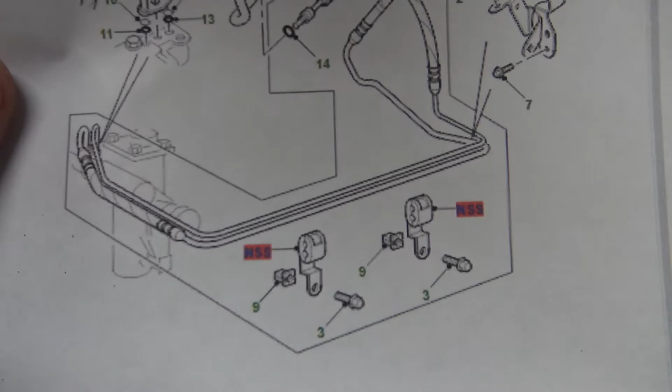That's lucky, wasn't it? Let's have a look at this. This is that parts diagram I was talking about for the work I've got to do on a Discovery. Now if we have a look here, let me get a pointing device. This pencil should do. This here is what I need, which is number...

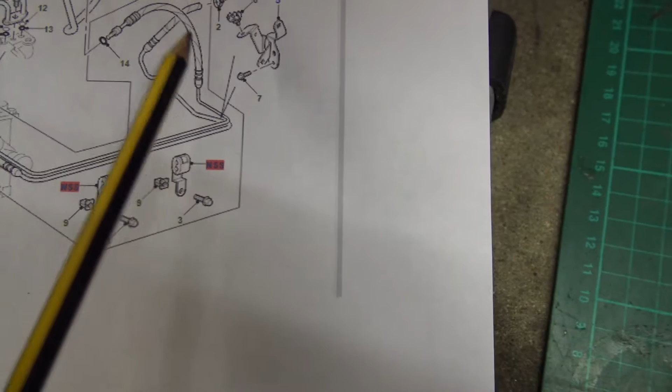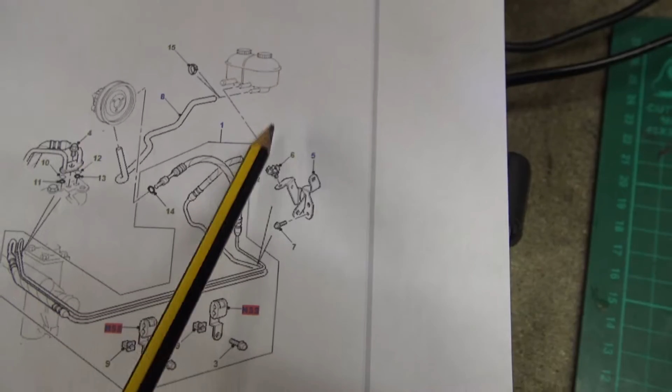What is it, number 1? I don't know what number it is, but it's that there. Basically it comes as a pair. That code goes to the box, comes around, and then one goes on to the thing, and the other goes on the pump. So this is what I need, because there's a hole around about here somewhere on mine, on the high pressure side.

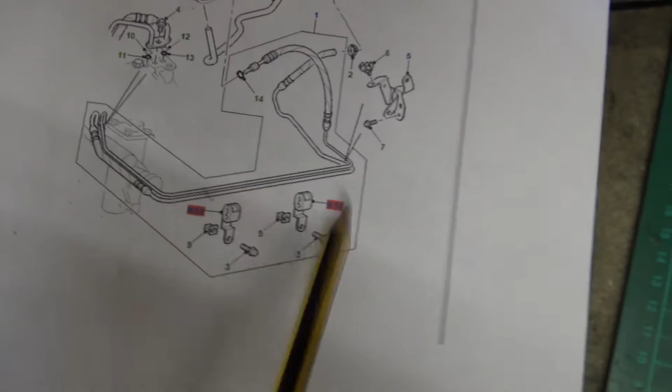So yeah, that's what I've got to get. Now the thing is, the radiator's up here, the intercooler's up here, and it's a pain to get to when I tried to get it off before. So that's what I've got to get, and that's why it's going to be a pain in the arse.

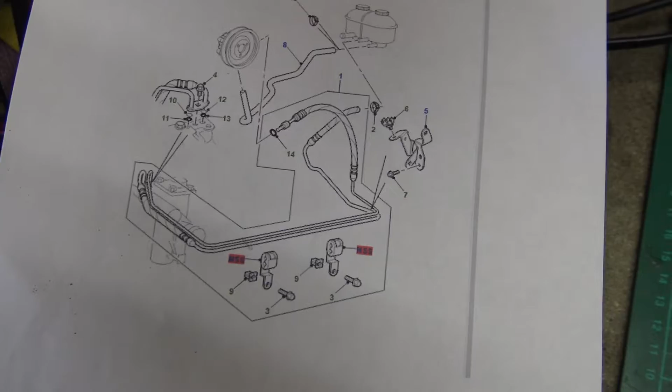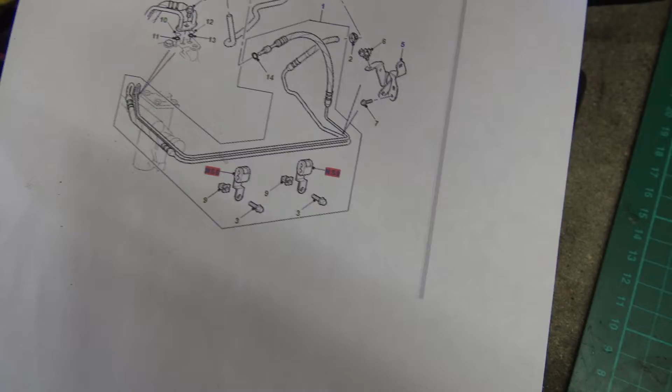I know some of you are like, oh it's easy, and it is easy, but it's just long-winded, because you've got to take the radiator out, the intercooler out, the lights come out because it's easier to get to that way. The grill's got to come out because it makes things easier - you put your hands through and all that kind of stuff. Not to mention all the rusty bolts and things, but that's the thing.

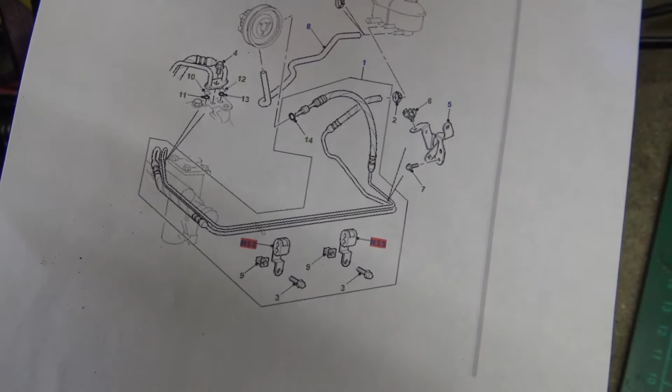So let's have a quick look in Haynes and see what they say. I always like to check - it always pays to try and... some people probably don't, and I never used to, but as I've gotten slightly older, I've learned it's easier to prepare things, and then things tend to go smoother. So I like to always check the Haynes and see what they say, and follow what they do. But there isn't - oh, there goes the bulb.

There isn't actually a section for removing the pipes, it doesn't seem so anyway. Suspension and steering, I can't seem to find a section for actually just removing the pipes. So I should imagine removing the pipes is a part of removing something else, probably because it's an easy thing to do, or it might be in this section for removing the steering box or something. But there is something else I need to do while I'm at it.

I need to adjust the backlash on the steering box. I saw that somewhere - steering box backlash adjustment. So I'm going to be reading that just to see what they say about that. As far as I know, all you got to do is... you're supposed to take off the ball joints and check for slack, but I know there's slack there. So I'm just going to loosen the locking nut on the box, and there's a little screw inside.

You just tighten it, and it should take up any movement. And then if it starts to get stiff or bind up or anything, then you know the box is worn, and you've got to get a new box or get it all reconditioned. So while I'm there, I'm going to do that as well. But I'll read up on that in a minute and see what they say, just to see if there's something I've missed. Maybe there's something I should know in there.

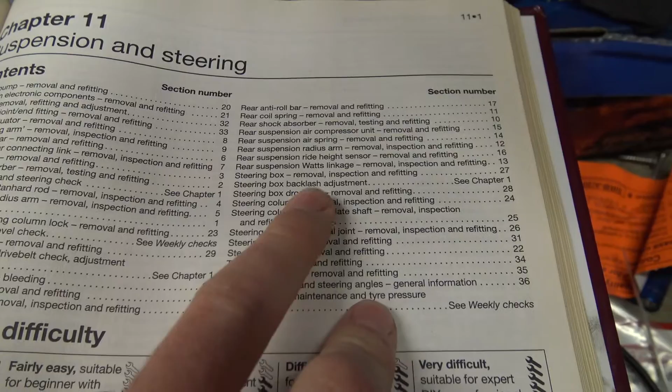But yeah, so all I've got to do is change them pipes. Bloody hell. But the trouble is, I think the pump's had it as well, because the air that's been introduced through that thing is starting to make it whine. It's started to whine a lot now, so I think there's a bit of trouble there. But we'll find out - that's in a few days to come.

I've got to try and save up for the pipes - 135 quid for the pipes, brand new from Paddock. And the pump itself is 100 quid. So I'm going to do the pipes first and bleed it all out. If the pump's had it, then I'll have to go get a new one of those, or get a reconditioned one, see what the prices are like. But yeah, oh, fun and games.

I tell you what, it's going to be bloody typical. I've been 3 weeks out of work because of this disease. All this time I've had, I could be doing it, but I haven't been able to afford it. As soon as I save up enough to get the pipes and do the work, they'll probably call me back to work, so I won't have time to do it. Plus I've got to drive that car to work. It'll be typical, but I won't say no, because we need money.

Bloody handy, these Haynes books. The trouble is, this one doesn't actually cover mine, but it's close enough. Mine's a 54, but it goes to 04. Still, bloody handy, the old Haynes books.

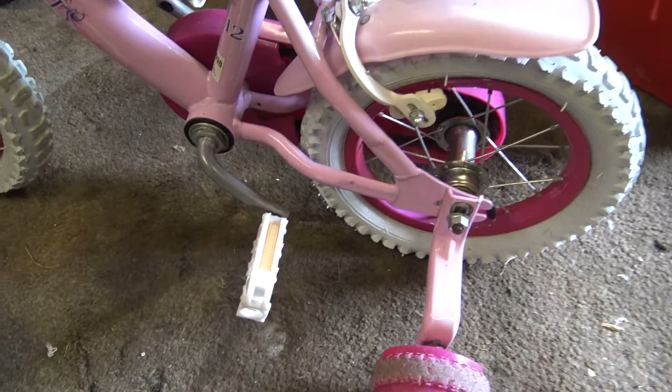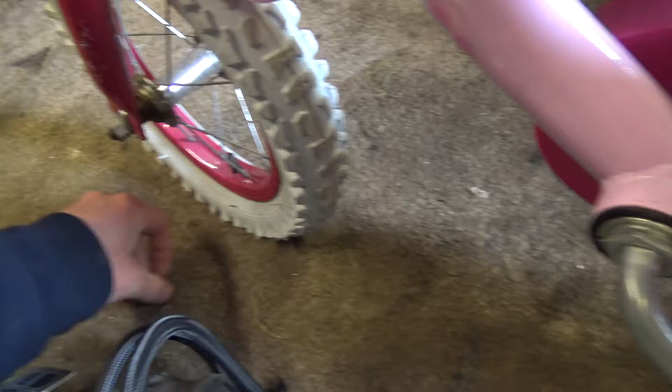I went out for a bike ride the other day, and I noticed my tyre was a bit low. I managed to get back alright, but it was a bit hard to pedal. So I'm just going to stick some air in there. This Ryobi inflator is pretty handy, I haven't worked out how to use the deflation part yet though. At least now if I pump my tyres up, I'll be able to go on more bike rides. It's bloody hard to pedal with half flat tyres, I'll tell you that.

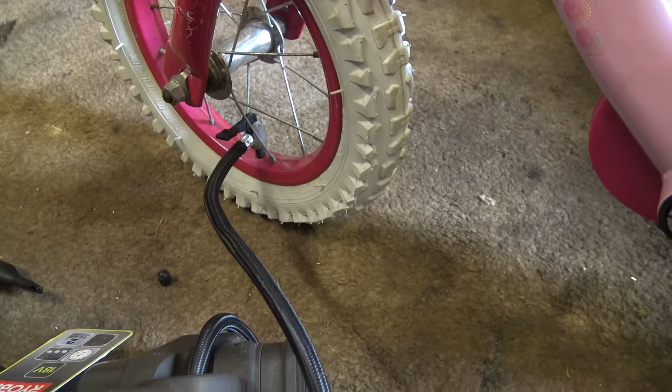How much should we put in there? Let's turn it on. We'll put 5, not 10. Oh, that's nearly there, 7. It says 7.5 even though I put in 5. We'll go to 9 then. Oh, that seems about right to me. Oh, that's lovely. What's that? It's 12.5, even though I put in 9.

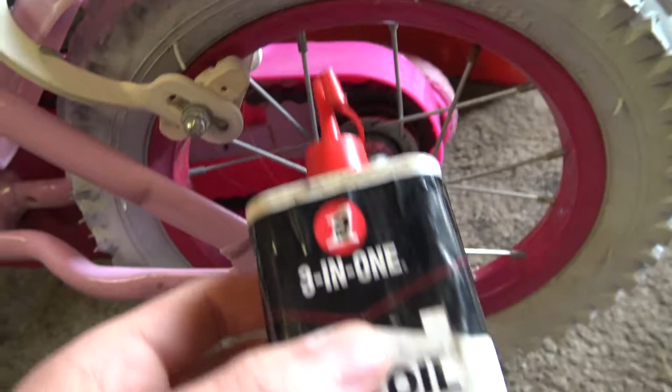Better do the back one, then I'll be well away. I better adjust my brakes. My brakes are alright, but I did notice going down a hill the back one weren't really working that well. So a bit of adjustment and we'll be well away for a bike ride, I reckon. A little bit of lubrication on the old chain as well. I think I'll use some of this 3-in-1 oil, since I haven't got any proper chain oil.

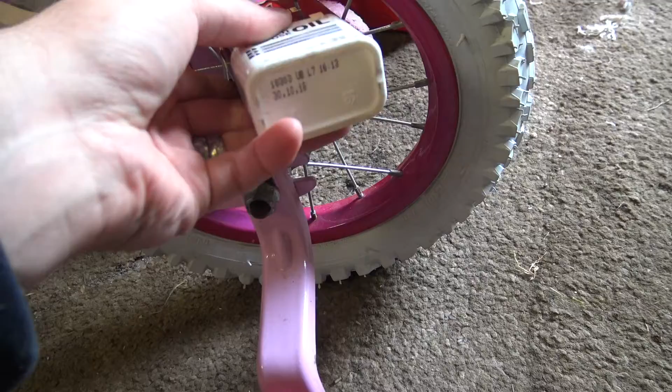The chain's a little bit tight on this. Might have to loosen it up a bit. It's difficult to try and do it with one hand, but I'll do it with two hands. And there we go, a nice lubed up chain.

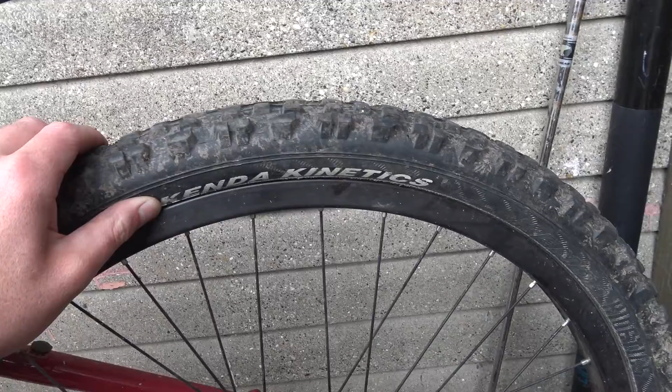Now we've got this bike, which is actually my daughter's, that needs a bit of TLC. It's been in the shed for a while. It's got mould on the grips, and the back tyre was flat. It needs a new tyre because this one is slightly too big for the rim — I think you have to properly line it up, otherwise it comes off the bead, off the rim. It also needs a new inner tube, the whatchamacallit that goes on the inside. I've got some spare ones though.

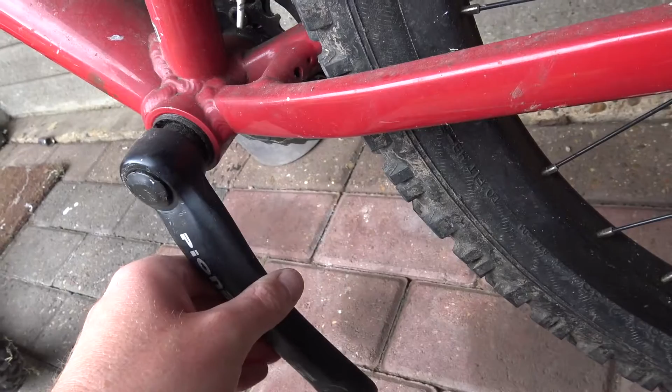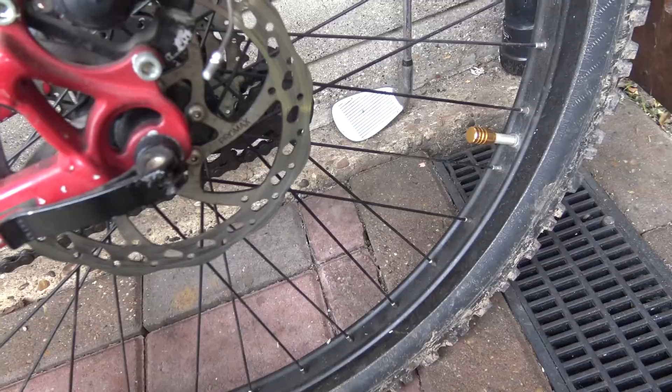That's seen better days, that needs doing up. You have to look into that — yeah, it needs some work on it. So, you know what that means, don't you? Get the old pressure washer out and give it a good old wash, and we'll go from there. Lovely.

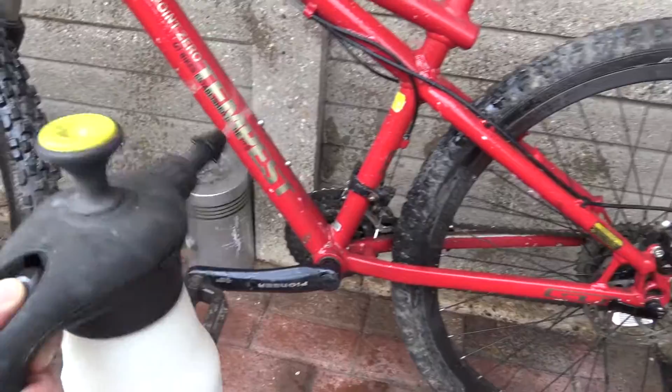Nice bit of degrease. Love it.

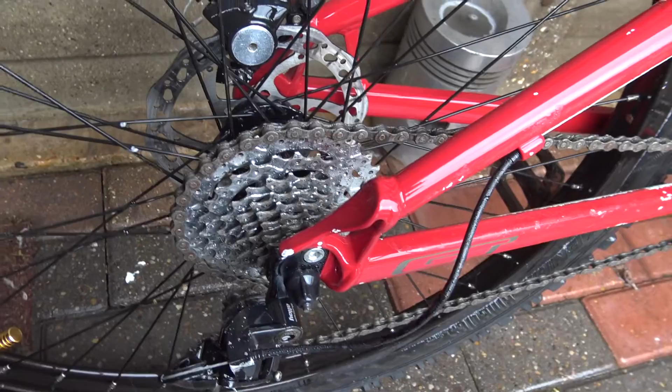Scrubbed up quite well, managed to get all the cogs nice and relatively clean anyway. Gonna have to give it a spruce up. I was going to get a new chain for it, but I don't think there's any need. I think it needs new brake pads front and back. As for the bearing, I don't know whether that is visible on your screens, but it's had it — well, it might not have had it. It needs tightening up perhaps, because back when I was a kid riding BMX you could tighten up the bearings, and I'm pretty sure you probably still can on these. I'm going to have to find out.

Take the back wheel off — if you can tighten it up, I'll be alright, if you can't, I'll have to get a new bearing. But that needs to be sorted out, and we'll be well away. Pretty pleased with how well it's scrubbed up. It's an old bike, I don't know how old it is — a GT Tempest 3.0, probably more than 10 years old. Good though.

Needs a new seat, the seat's not very comfortable.

The seat that came with it was even less comfortable. Nice seat that came with it though. Ooh, let's see what else we can do.

I'm just about to start doing this bearing, but I've had a look everywhere and found the seat that was on this bike when I bought it. So I want your opinions - which one? Keep this GT seat I've got off an old BMX I used to have, or put that seat back on it? Tell me what you think, what seat should I put on it?

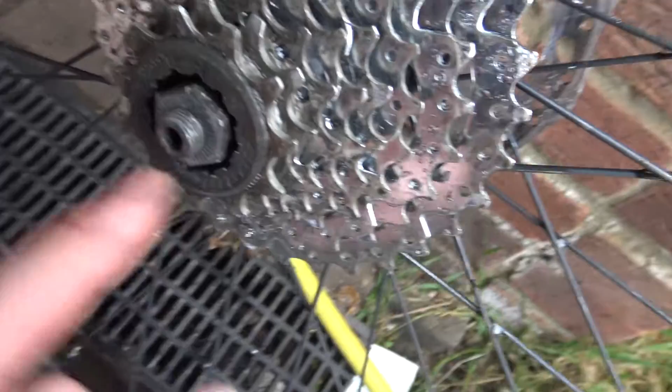Righty tighty, you lot, got this apart now. This was loose, and it says there - lock at 40 Newton metres. I'm not going to bother getting a torque wrench on it, I'm just going to tighten it up. So lock that nice and tight.

That should hopefully fix most of our bearing wobble. Still got a little bit on it, look. But maybe after I've tightened that up, that might go away. The bearing could do with being repacked with a bit of grease, but I'm going to leave that for now - going to clean all this off.

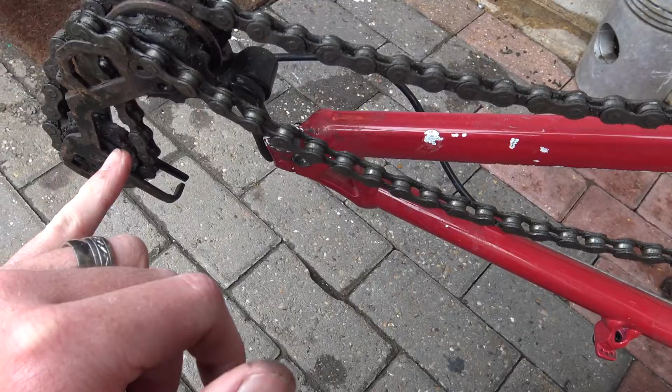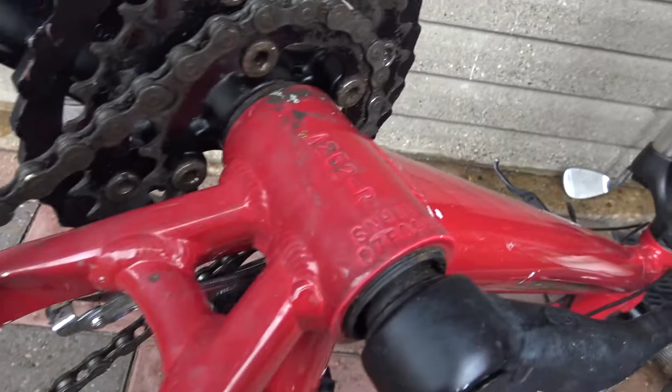It's all seen better days. I'm going to give it all a nice bit of a clean, get all that old oil and grease off of those cogs, and we can put fresh stuff on. Then we'll be well away - well pleased so far, nice.

Lost all my little reflectors off the pedals, look, long gone. At least the crank's alright, there's no play in the crank, which is lucky. That's what I always used to do - I always used to kill cranks for some reason.

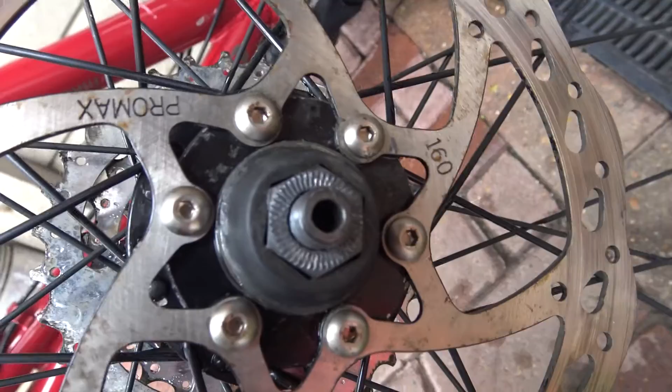Never mind, let's get the old socket set out and get going. Well, I gave it a tighten, seems to be working alright. Behind this black cover there's some bearings, there's enough grease in there. So I tightened it up with a spanner and a socket.

Now I'm going to put it back together, put the quick release thing back on. No, I'm going to clean all these up first and then I'll put it back together. So next we've got to sort out the gears.

Now it won't go into the last gear, there's not enough pull on the cable. So we've got to adjust it using this here and a pair of pliers - get our Allen key and a pair of pliers, undo it, pull the cable a bit, then we should better get it. We've got to keep fiddling with it until we get all the gears on the right number.

So I've been playing around with the gears trying to get them to work, but I can't get it - it'll either go into gear 1 but won't go into 8, or I'll get it to go into 8 but it won't go into 1. I've been playing around with the screws, the length of the cable and all sorts, but I'm going to have another play around tomorrow or some other day, because we're in that time, got to go and have some dinner. But I'm getting there.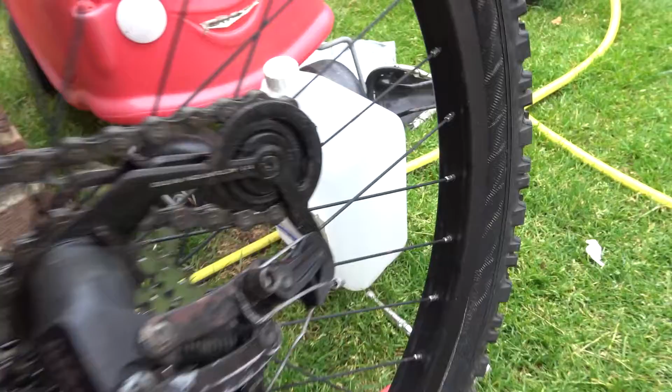It's looking good. If the worst comes to the worst, I might have to just get new ones, because I think these are worn, the cogs are worn - look at that on there. Don't know whether you can buy new bearings for those or not. Might be able to - might be better to undo that Allen bolt, take the cog off, maybe put a new bearing in there perhaps, because I think they're loose anyway. I think it could do with a bit of TLC on there. Yeah, we're getting there though, we're getting there.